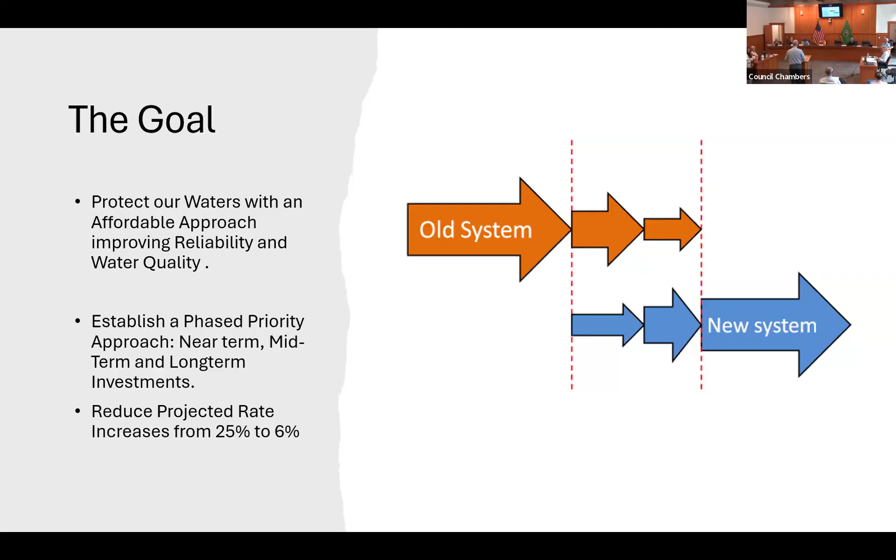Boy, this is great. My eyesight should have something here. So we talked about this.

The other thing that we found was our collection system has some issues with infiltration and inflow of water into the system that was overwhelming our process. When we had the high flow events this last winter, we had peak flows approaching 5 million gallons, with a plant design of approximately 1.5 million.

1.8 million, I'm sorry. So at any rate, we far exceeded the plant's rated capacities, which created a real issue.

The other item that we found was a communication system that's extremely dated. Some of our systems were put in the 1990s, and now we're into the late 2020s, so there are some upgrades that seriously needed to be addressed and needed to go forward.

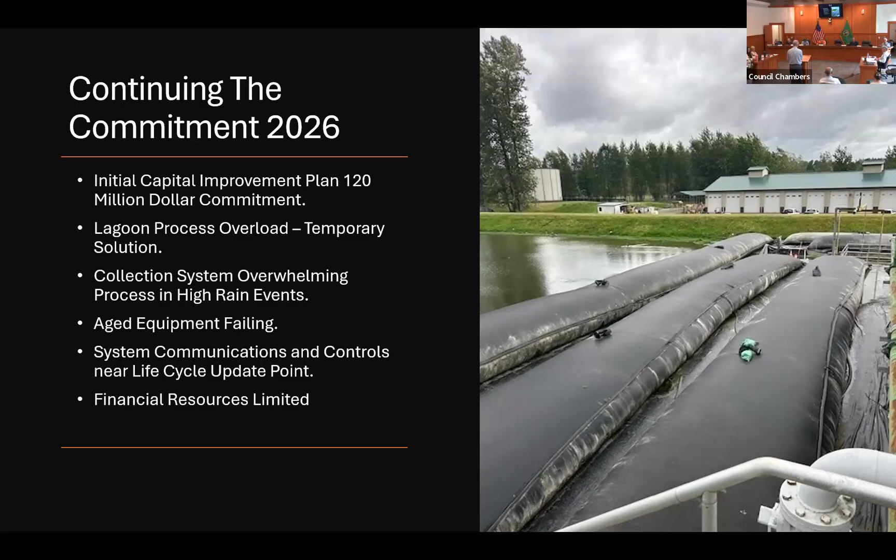Most importantly, we have a headworks system where all the water enters into the plant through a single channel and then goes through a screening process. We've experienced recent failures, as recent as today, in that system, which underlined the priority that needed to be upgraded and repaired. This last winter was also the point of failure that we had, where we ended up with an overflow situation into our lagoon from the headworks.

So we had to develop a plan, and when we were speaking with Wilson and with Parametrix, we wanted to identify three strategies: what do we have to do right now, in 2026, immediately? Then what do we have to do next, in 2027, 2028? This council is going to be faced with some major decisions going forward.

One of the decisions is that we're moving away from the focus on the solids building, the new solids treatment facility, and moving towards renewing the facility that we have right now, working from the most critical components first, and then working our way out from there.

The first item we need to do is regain that capacity in the lagoon, and then begin the process of having the engineering performed for the headworks facility to get that started, and also for a slight expansion of the existing control building that we have right now. The reason we included that expansion is that it's going to be the backbone for the future upgrades for the telemetry and for the computer systems, control systems of the treatment plant. So that needs to be in place before we can start making those next upgrades to the plant process.

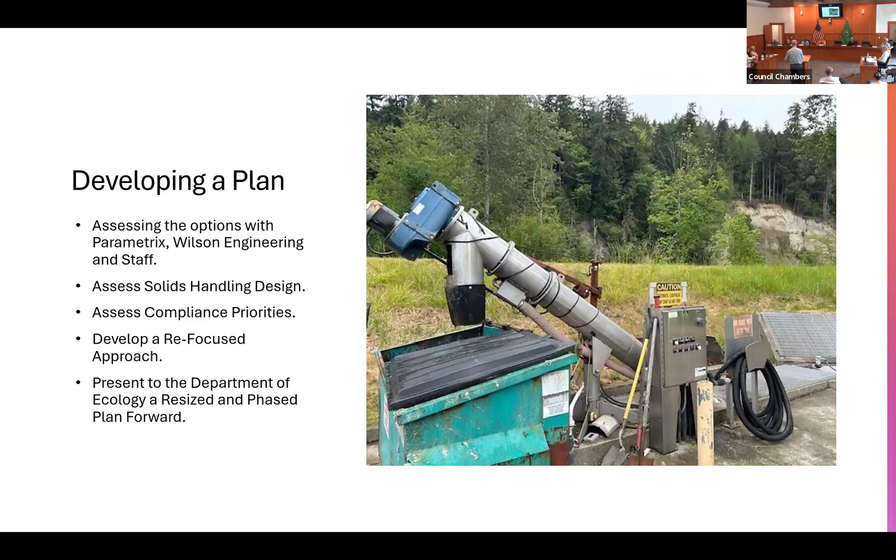In this last slide you can see the headworks right there, and that's what they actually broke today with the shaft. They're currently working with that and trying to locate parts to get it back online again. So we're at a point where we need to have some redundancy in that area to allow for maintenance and for flows to continue unrestricted.

The other key item we needed to address—there are two other items. Flow monitoring: in 2026 we need to begin a flow monitoring system process to look at our dry season and our wet season flows and identify where those flows are coming into the plant, so that we can identify the places which need to be repaired first.

We suspect a few key areas that are the major contributors to the inflow infiltration of the plant, namely along the Carbon River, where it goes from River Street to the treatment plant. That's a high suspect area, just because of the nature of the trees, the water table, and proximity to the river there. So we're going to try and make sure we identify where that's at.

Another key thing before we go too far forward is that we're going to be asking council to approve an organizational study on the Public Works Department, to look and make sure that we're right-sized to be able to go forward with this. When we go before the ratepayers, we need to be able to show that we're making all of the steps to be as fiscally responsible as we can.

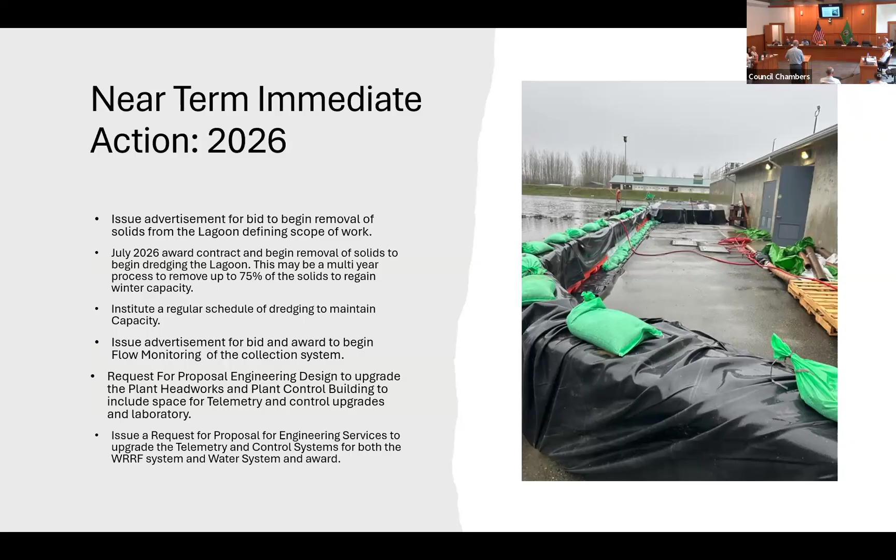And then we move into the actions so that by 2028, we should hopefully be going to construction on some of these items. We need to have that headworks. I think our public works would be happy if it could happen before then, but knowing the amount of work that our engineering firm's gonna have to do, it's probably more likely between late 2027 and 2028 before we see action on the headworks and on the treatment facility, on the control building.

Following that, we need to go out for bid for engineering to upgrade the process improvement inside the treatment plant. What that's gonna do is gain us capacity as we move forward by working with our control system within the plant, a newer updated control system and mechanical devices that will help make that plant run more efficiently going forward.

A lot of our equipment is, again, mid-1990s dated. It was the technology at that time, and the technology we have today is far more advanced: more efficient aeration blowers, more efficient ways of transferring oxygen into the water, more efficient ways of disinfecting with the UV system. And speaking of the UV system, that is also obsolete. Right now they've been getting parts off of eBay. So we need to update some of these systems that are at the point in their life cycle where they're able to make it, but they need to be updated.

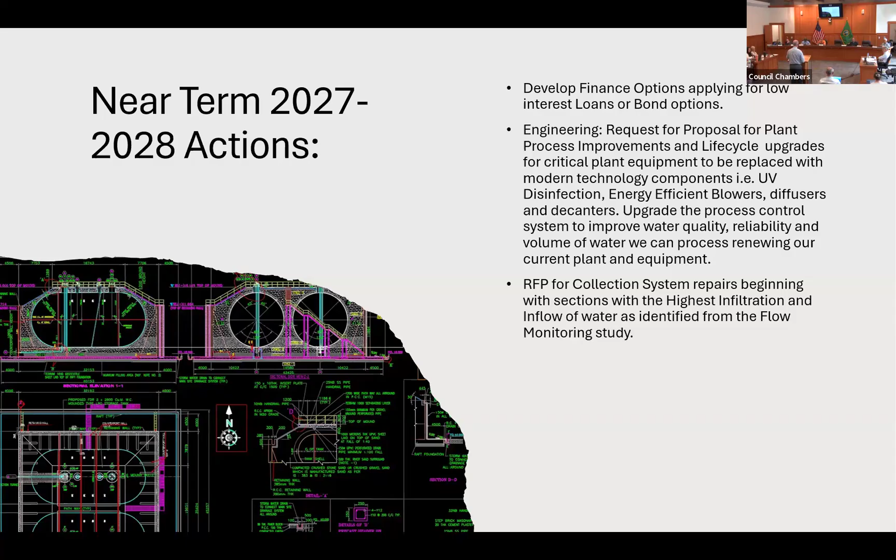We need to create additional space to bring in upgraded servers for the control systems for the treatment plant. Also during that time we need to look at a telemetry study to include our water system as well, for all of our offsite facilities, pump lift stations, to communicate with our treatment plant. So we have a lot of work in the way of communication and telemetry to move forward on, and it's going to take some space, so that backbone has to be in place before we can start the telemetry work and control system work in the plant.

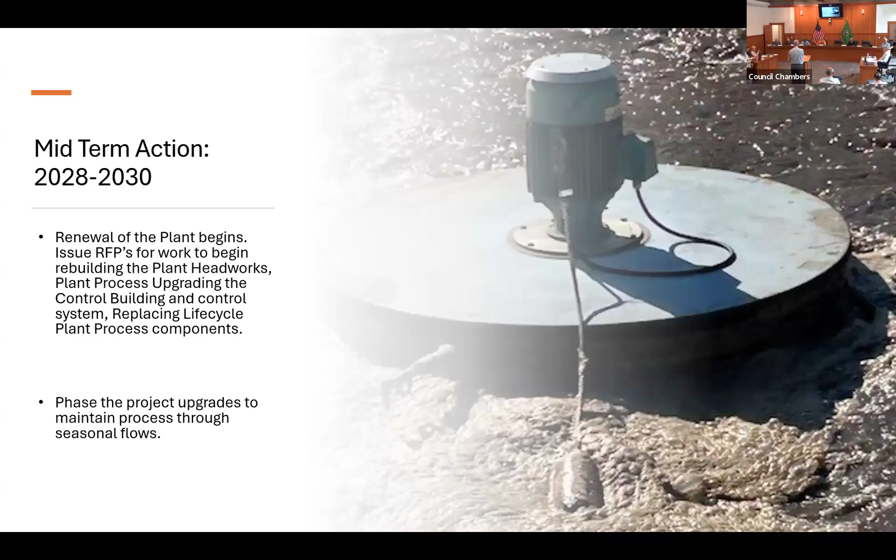They're going to require us to put in some test wells to ensure that we have no water leaching through the liner into the groundwater there, but that's just something that would require a new lagoon, or any lagoon going in today. So at any rate, that's kind of where we're at.

I think the overall plan we have now has gone to a 20-year phased plan with near, midterm, and long-term improvements, and an evaluation process on that.

This also ties into our rate study. Our goal was initially a 25% projected rate increase for sanitary sewer, and that just was a no starter for us. It was really just too much, I think, for the citizens to take on. After reviewing the rate study, which will be coming before you, we're looking right now at about a 6% increase in rates to be able to stay consistent with our capital improvement plan going forward.

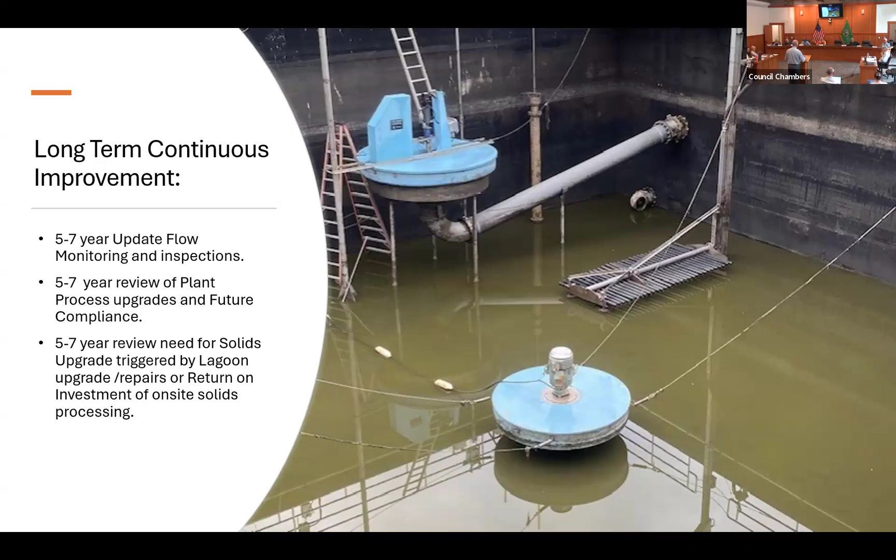And I thought that was really good. That rate isn't showing any staffing changes, but it's focused just on the operations and maintenance of the facility, and on the capital improvements we need to make to our facilities to keep up with everything.

So, questions? We have Engineer Hungerford with us, and Steve Daston with the treatment plant, if you have any questions I can answer.

Ed: Did Parametrix design the original plan in '72? Oh, good question. You know, I don't know who did the lagoon in 1972. I don't think it was Parametrix, though.

Okay, yeah, it was designed for 1.5 million. Were you saying we're taking in 5 million? No, actually you corrected me, it was 1.8, but the SBR system was done by Parametrix. We actually received a national recognition for that treatment plant.

When we built it, it was cutting edge. It was under Mayor Paul Rossi, and engineer Doug Berkshauer was the person who was the engineer at the time that did it, and it was cutting edge technology for the period.

The idea of the plant, which I thought was ingenious, is that it was a sequence batch reactor where you add on an additional cell to gain more capacity. So we built it with the idea that we would have to add on additional cells in the future to keep up. It was a package type of plant where you could continually expand off of it.

So the city received a lot of recognition for it, and it served us well. Yelm has essentially just switched over to a different process, but they had the same process at the same time that we did, and it operated very well.

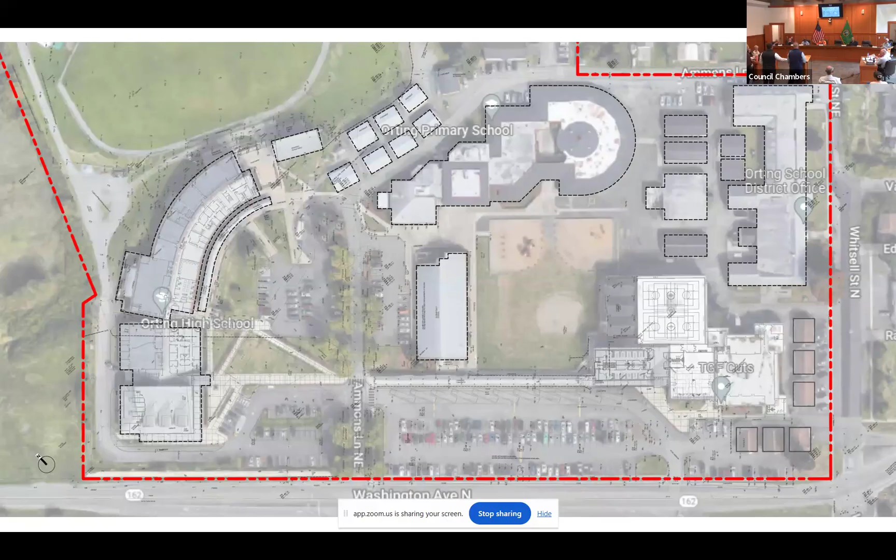This is the current high school site. Cliff and I were principals there for a long time. It has a district office, an elementary school, and a high school. Right now, the majority of our high school students are housed in portables. That's going to change when the elementary moves locations.

So Matt Carlson, who many of you know personally and have known for years, current principal, he'll take over the entire facility, save the rectangle that's the district office.

So as we're thinking about where this new facility goes, we're thinking about what makes sense now and what's going to make sense for the next 50 to 100 years, because many of our buildings have been here as long as many of us have been here, so we haven't made those changes.

Part of what we still see as a way to secure it is that frontline buffer. If you think between the Performing Arts Center, the West Wing, and the gymnasium, we think that what we would call the public edge is where we'd see that gated and secure. Right now we have an active roadway through the middle of campus, 1,400 students moving back and forth, and it's not secure, it's very porous. So we want to tighten that up over time.

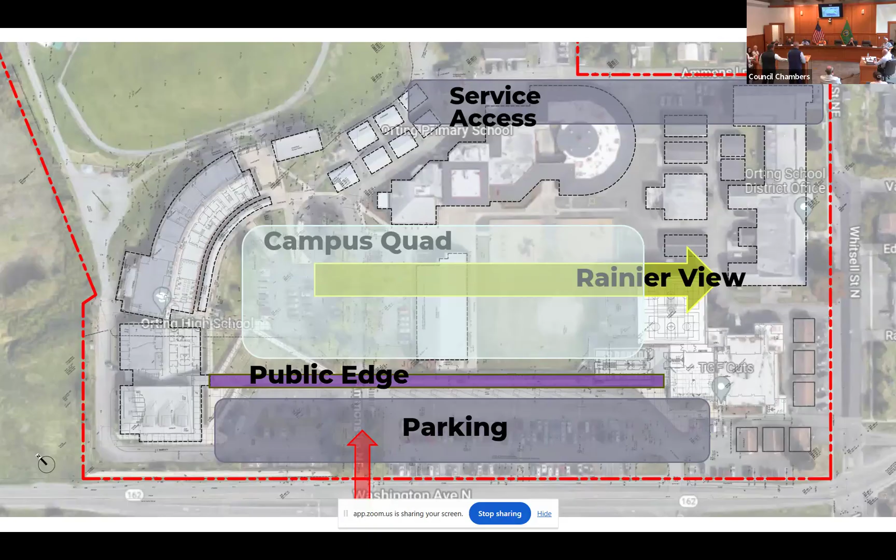So after this phase, we still want to maintain that view and the connection. As we're thinking about where this first site goes, that's part of the idea - how do we make it more secure, but hold on to what makes Orting, small town, big view, special. So looking at where that's going to go, we've determined that the best place for this next new wing is right next to the West Wing.

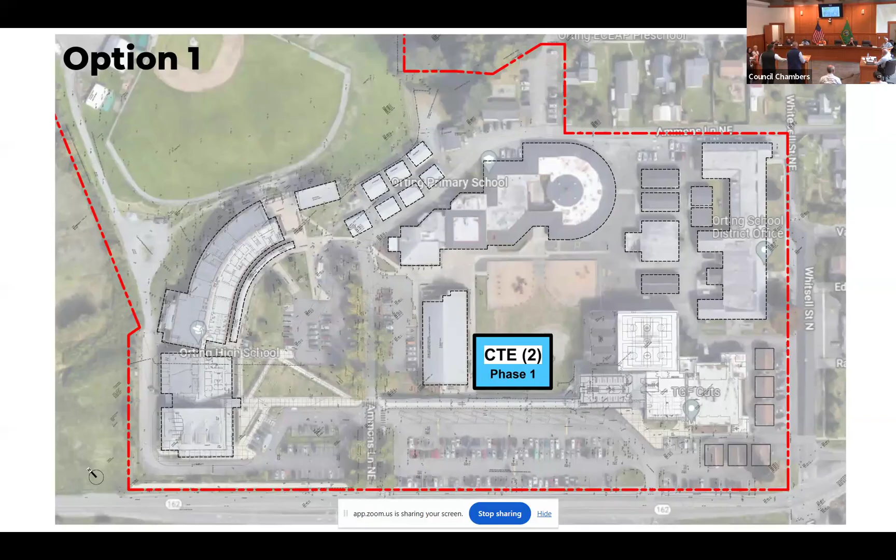So the West Wing is just immediately to the left, and it's sandwiched between that and our current gymnasium facility to the right. As we will come back and share future site plans, we think that's going to be the best location at this point in time because we can expand and grow in two different directions in future phased bonds, not in this one.

So when we get done with this phase, this is what it might look like. Our 1950s gymnasium that many of you competed in back in the day, it is literally falling apart. We can't refinish that gym floor any further. You see cracks in the stands. We think that's a tear down at the end of this phase.

What we could do if we relocate and move those 6 portables that surround it is open up to more parking. I know many of you here, high school kids are parking all over town. There's a shortage of parking, and we want solutions to that. So we think at the end of this, the portable solutions that are in our parking lots now go away and that facility comes down. Then we open up more parking space for our students, our faculty, and our community as well.

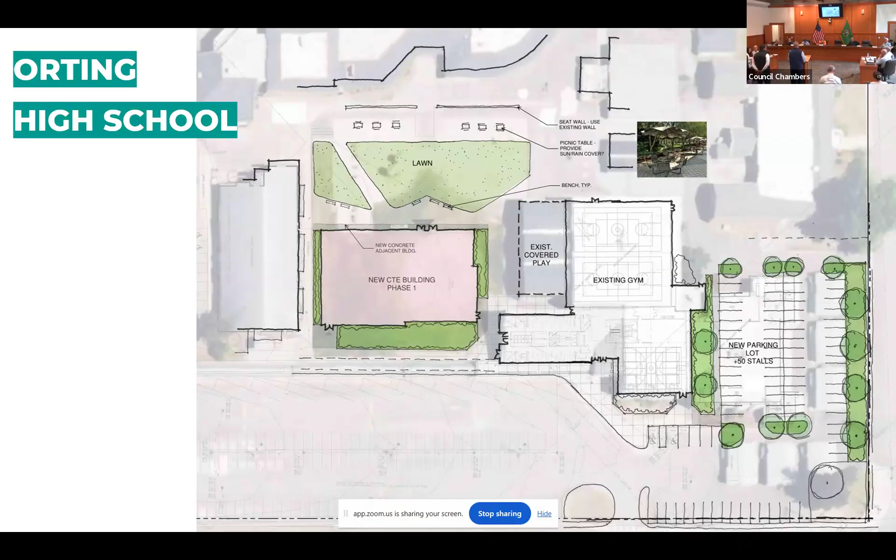This has been a dream of Cliff's - our new career technical education wing. We're really excited that this focuses our kids on careers and trades. Most of our graduates don't move away and stay away - they come back and fight and compete for local jobs. So we've excitedly built some partnerships, which Cliff will talk about, and I'll share a little bit about what's happening in the career tech ed wing.

It's what we heard loud and clear from our constituents. A lot of our students - probably more than, we have a higher average than anyone in the county - our students go straight into trades. But what you're finding is when you go onto the trades, someone gets a clipboard and someone gets a shovel, right? And you choose that based on what skill sets kids come out with.

How do you talk to kids about welding? They look at videos about welding and read about welding. If you go onto the job site, you're not likely to get handed the welder - you're likely to get handed the broom. So what we really need is students getting their hands on up-to-date tools, being prepared to go into the workforce, go into trades, and be competitive in our region.

So with that, we need facilities with present tools, up-to-date equipment, in both the sciences and all of our trades. Part of it is we're remodeling the high school, and we're going to put in the back a metals and wood shop to support our ag mechanics program. We're going to update our culinary facility because it doesn't have proper ventilation - literally if you burn bacon, we evacuate the school. There's no vent, all you can do is crack the window. So we'll be doing some remodeling over at the high school and then adding this building.

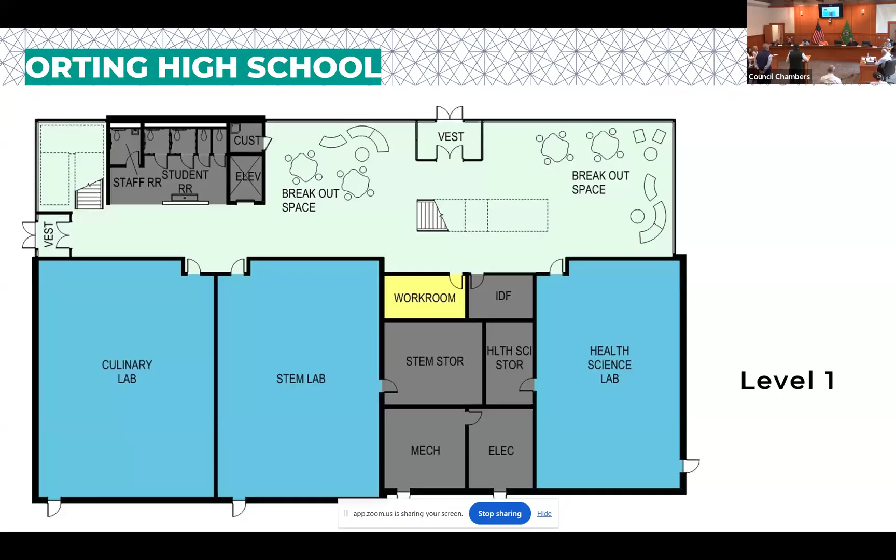What you see here is a culinary lab, STEM lab - which would do science, technology, engineering, mathematics - opening up to a breakout space, some storage, and a health science lab, which we know supports sports medicine, health, and medical careers. Upstairs would be multiple science labs - 4 science labs.

Our current science labs do not fit a full class. Our current science labs don't have enough oxygen - the only way we can meet health code is we had to add a fan to the windows that we turn on while students are present, so there's enough oxygen in the room. So definitely we need a new science lab, and that's what will be provided upstairs.

Share a little bit about Clover Park Technical College. Oh yeah, we went to Clover Park Technical College, and what we're finding is there's some very highly competitive jobs for kids that go into Clover Park Technical College. They do something called the mechatronics program, where back when I went to school, you either welded or you learned computers, and those two didn't play together. But what they're calling now is Industry 4.0 - they don't want kids who can just weld and they don't want kids who can just code. They need kids who can run a computer, run a machine virtually, and can fix it. So they have these mechanical arms that the kids work on, keep up, oil, and check the friction on everything.

And they also have virtual machines running 5 to 15 seconds, or even an hour, ahead. They're simulating what happens if certain changes are made, and fixing the machines virtually ahead of time. They know when a machine's about to break, so they can go in and fix it without stopping production. Cutting edge stuff, it's amazing.

So we went and visited them and asked what they need our kids to be able to do to get inside this and land viable jobs, starting at $80,000 to $90,000. They said they need hands-on machines and complex systems with multiple variables that students can learn to navigate. They don't care if it's a slot car working with AI or a gyroscopic deck, like one they showed us for an oil rig that was being welded, where workers had to handle both the computer side of the gyroscope and the welding side.

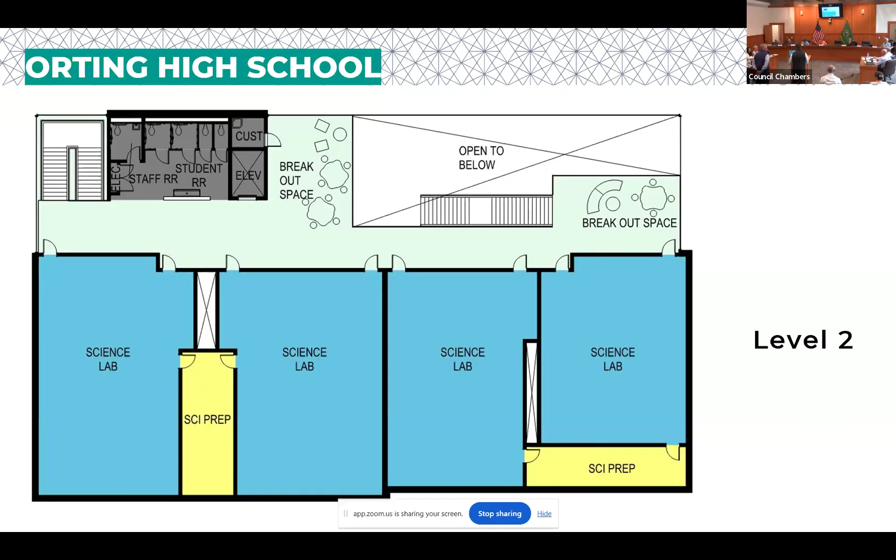Next up, Orting Elementary School. I'll give that over to Liz, and she's going to walk you through what we're thinking for the elementary school.

Part of the bond scope of work was a commitment to a new elementary school for 600 students, and also included a field. We want to highlight that it was really important to the district to have a multi-use, community field, but also one large enough for our high school events, so that scope was enlarged a bit from our initial plan.

To the south is a ditch that we're going to be filling in, and there are some supporting wetlands we'll be mitigating as well. We haven't started that process with the city yet, and we're anxious to do so. We're wrapping up both a traffic study and a wetland study, so a lot of our due diligence investigation has been ongoing for the last few months, and we want to make sure we're doing it as accurately as possible.

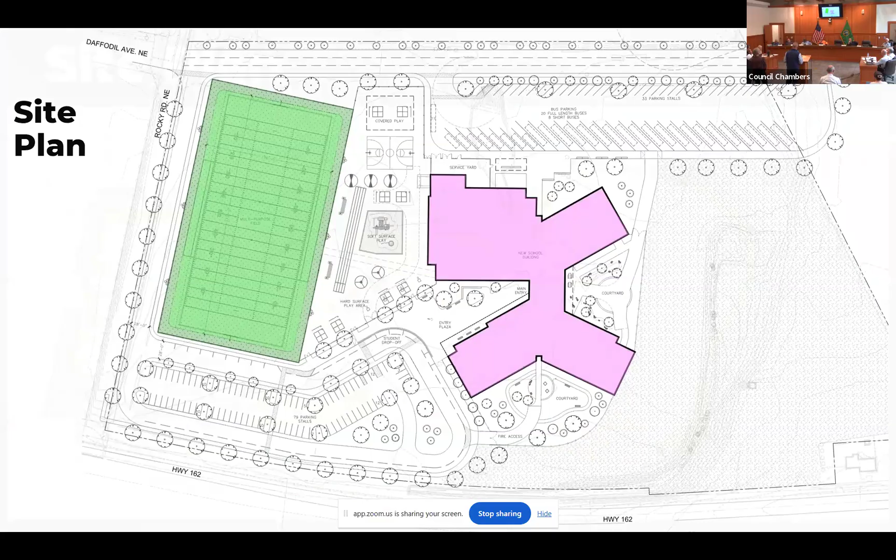We've kind of mapped it out, and there's room for tennis courts, soccer, baseball, fast pitch, you name it. We're thinking really a place where the community, not only just the local but the surrounding, can come and recreate locally. Part of that will be visioned out as we complete this and think about what's next. That's some of what we're excited about, the what's next conversation. How do we evolve for the future to support the surrounding areas?

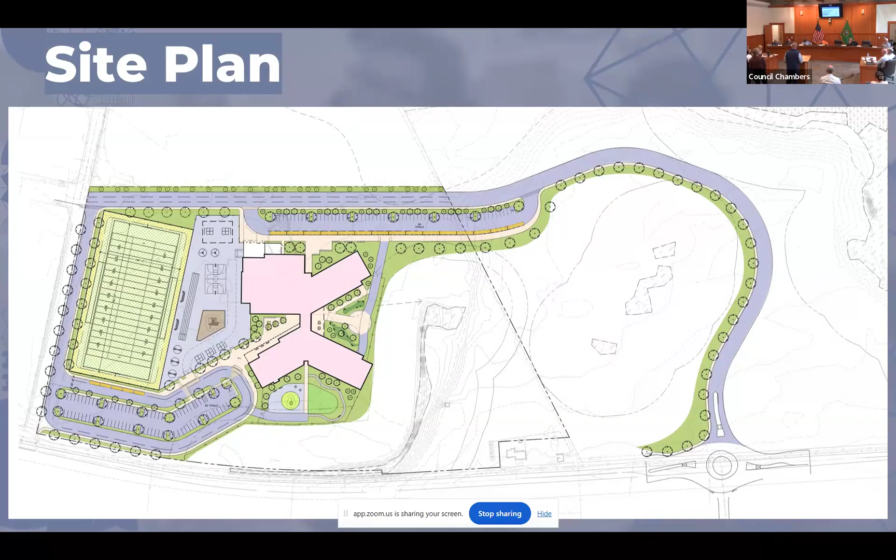You don't want to get too much into the floor plan, however we have been, similar to what Cliff had done before, outreaching to teachers and students for input. Safety and security is a primary goal. Although we're really heavily supporting the community in athletics and access, we want to make sure our school is super safe. So we're just starting those conversations as well, about fencing and things like that, to ensure access is single point so people know where they're coming and going.

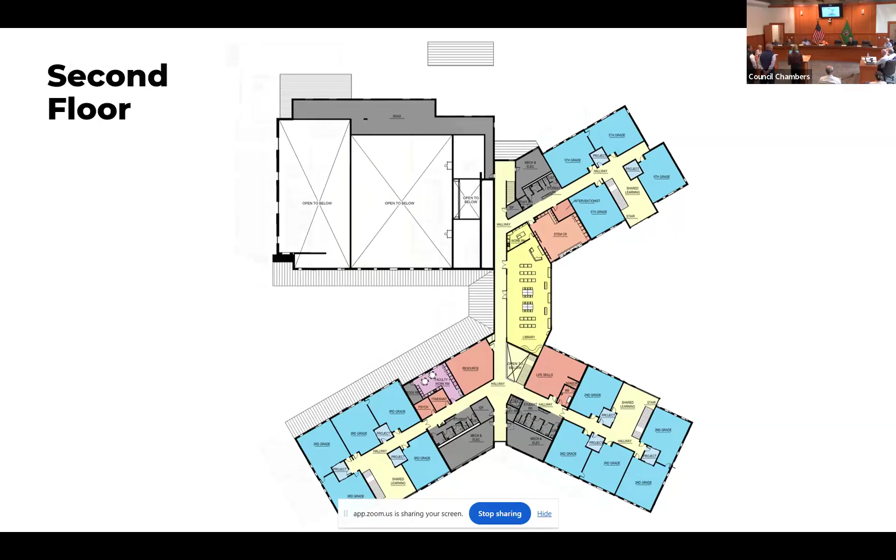That admin core, you can see out, and also look in for that main corridor yellow space, as well as just as important as that beautiful view, right? So to the right of the page is the mountain view. The architects did a great job, I think, to create this star footprint, if you will, that really hugs and focuses on that mountain view.

One component that I think was interesting - I was on the phone with the contractor on the way down here, and he's like, this is actually laid out to sequence very well. We talked briefly about schedule, didn't dive into the construction schedule, but we saw how quickly they're moving forward. So with an April start, moving dirt, they want to go into underground pilings right away after a month, and then even work on vertical steel, flying steel by the end of July.

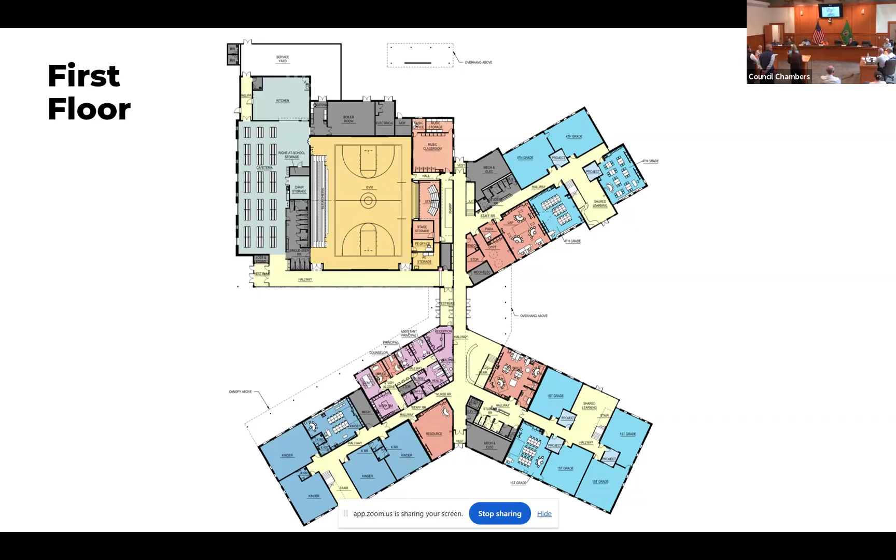Next slide. We definitely are aware of your design review guidelines. I think the mayor has had a couple outreach meetings that we've done with our architects to talk about materials and form. Our priority for the community is making sure this is a timeless building that we can meet within your general outlined criteria, as well as the suggested materials. We want materials that are durable and maintenance free.

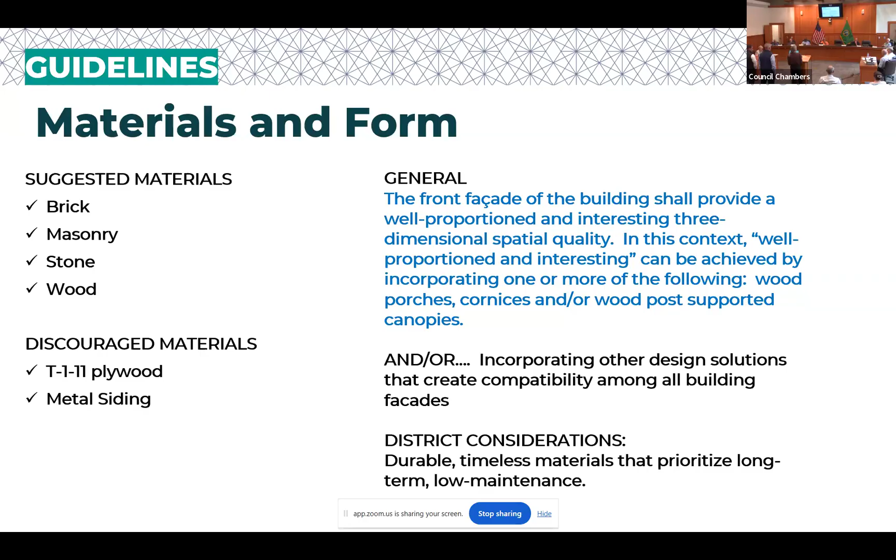So one component, we might see a lot of wood character in the building. In the imagery, we're talking about having some kind of siding that maybe mimics wood to make sure we can have a durable building. We haven't decided on any components of materials at this point yet, but I wanted to send some images to you so you can get a sense of what we're looking at.

Some of these design ideas, in no particular order - we are working with architects right now, and we're going to come back to you with further development. That's the view.

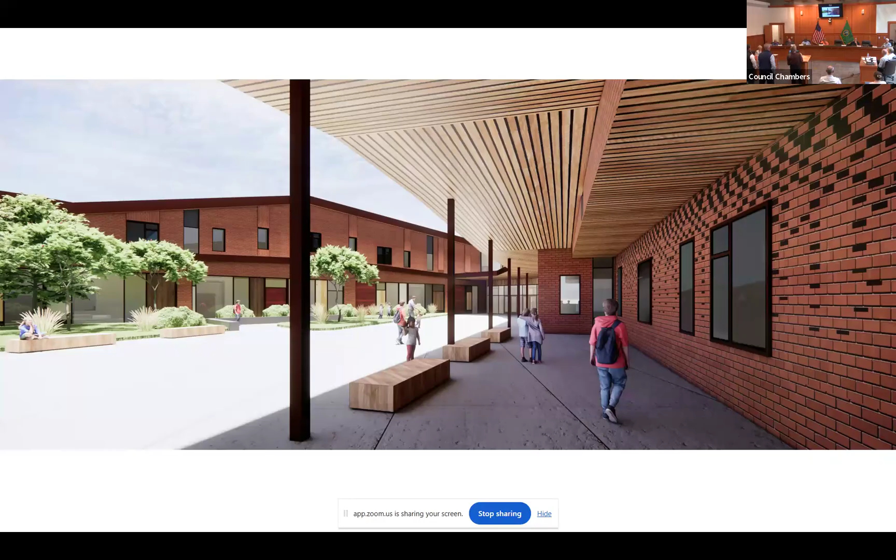This is that entry canopy that you saw at the admin, kind of luring visitors, parents, and kids in.

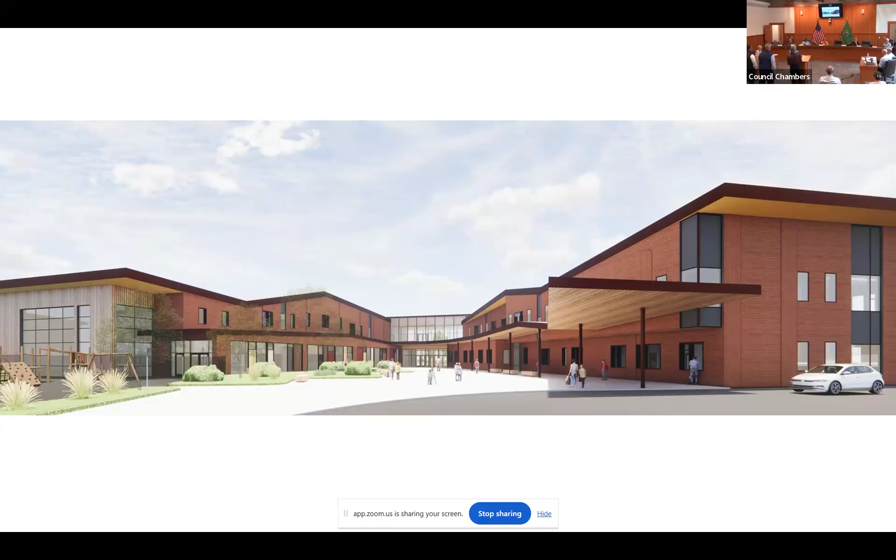This kind of taking a step back in that drop-off parking lot. So this is still the entry. When I noted that area on the left, that's the start of the playground space, and that's that commons cafeteria space. And then the brick on that left side would be the gymnasium.

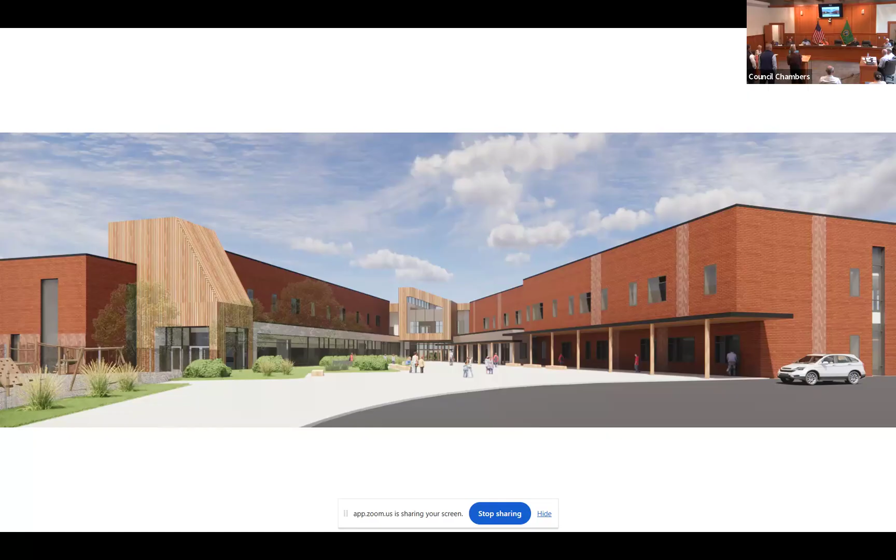This is just another view of that entry space, another way to look at it from an architectural standpoint. And again, these are just design concepts and ideas, so I'll go quickly through them.

Did I miss anything you want to add in? I can answer any questions you have about where we're at thus far in the process.

What is the name of the architect he chose? NAC Architecture. And Skanska is the contractor? Skanska is our general contractor. Okay, and you are the owner's rep, correct? What outfit are you with, what's the name of your company? Alliance Construction Management. Okay, all right, thank you.

As an independent owner, part of our commitment is not only to support local businesses, but we want at least 10% of that project to go to minority women-owned business. So part of how we creatively package and work with Skanska is to make sure that it's attainable for our local contractors to access some of the projects that'll be released eventually.

How involved are the school board members in all of this? We have two of our members that are part of the Bond Oversight Committee, so they're following the journey every step along the way. And then our three presenters, our owner's rep, architect, and builder, share progress updates every month to the board of directors.

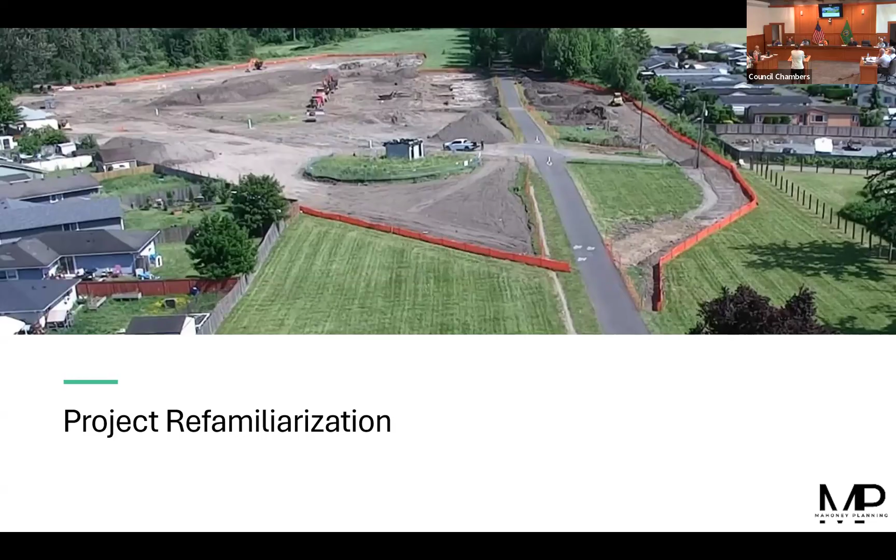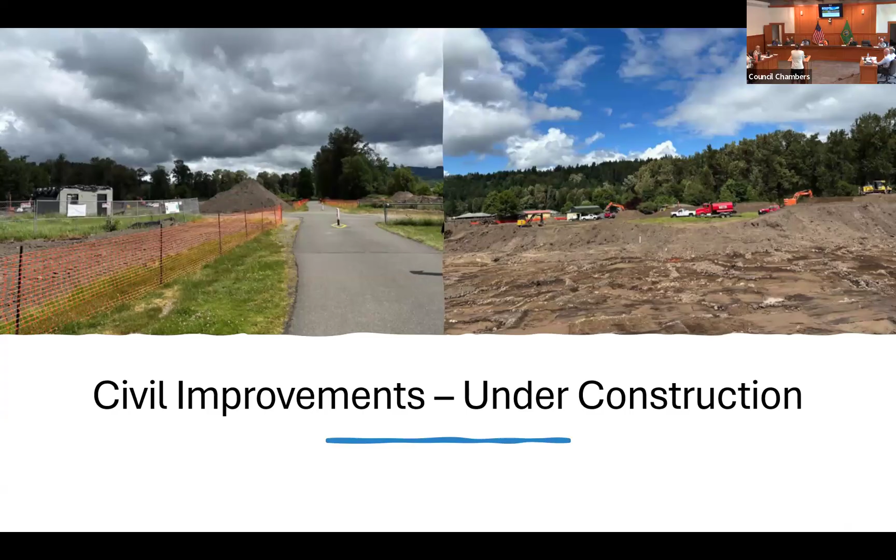So that's the layout of the project that was approved by council. After their preliminary plat and PD were approved, they had to work with JC and I to get their civil improvements and landscaping plans approved. That was done in early 2025, I believe, which authorized them to begin construction. These are some images of those early civil construction improvement days, when they're installing utilities, roads, lighting, stormwater infrastructure, things of that nature.

I think these images go through some site visits that I've conducted over the last couple of weeks, once as recently as yesterday. Part of the plat approval process includes the applicant having to approach planning commission for street names.

Our planning commission has the responsibility of naming streets in Orting. The planning commission decided at a meeting earlier this year to extend the name Brown Way, where Road A comes in off of Brown. And then Road B, if you're coming into the plat off of Brown, the road that feeds into the new parking lot, that's Fisher Street.

You can see that there's no parking signs on one side of either of those streets. That was a requirement of the fire code, because the streets are narrow enough that one side has to have those restrictions to allow for an engine to come through.

And then tract B, which provides access to 2 lots, they decided to name that Bueller Court Southeast. This is all after notable Orting residents.

And then the image on the left shows the wetland protective fencing and signage that's been installed, which provides a permanent barrier between development and any of that protected on-site area.

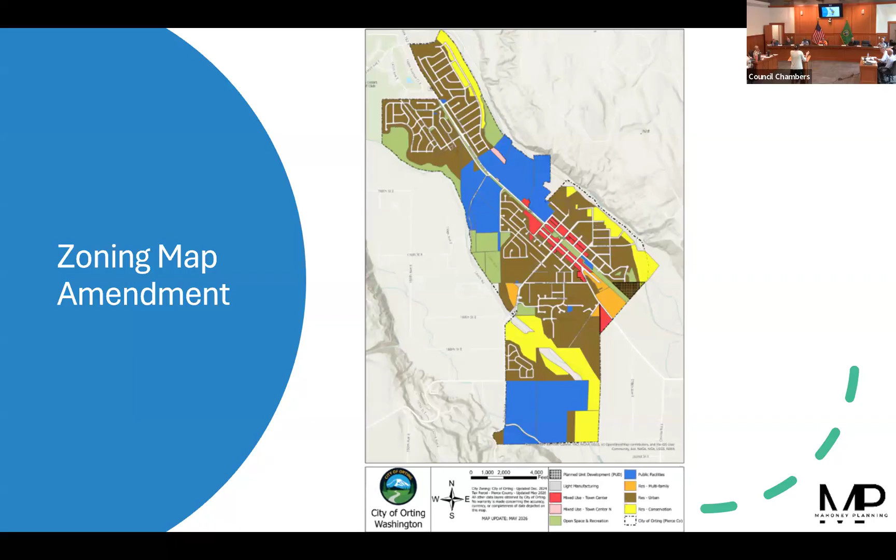And then this is what the zoning map amendment would look like if the final PUD were passed. It requires an overlay of the area. I know this is really hard to see here, but this has been prepared by the city's GIS technician, and there's a layer that's been applied over the new plat to show that it's a PUD overlay.

So the project schedule: we're here today to refamiliarize council and ask council to set June 10th for a public hearing. We'll be in front of planning commission on the 1st of June at a separate public hearing, and they'll issue a recommendation for council's consideration. We'll be back on the 10th for that. Then the ordinance, if council were to approve this, would be effective 5 days later, and so 5 days later they would likely be coming in with their building permit application.

Are there any questions?

Is 4,000 square feet for a building lot pretty common? These days, yeah. Not in Orting, our minimum lot size is 7,200, so we've almost cut it in half.

Some cities have maximum lot sizes now to require developers to... Are we talking Puyallup, Sumner, or are we talking Seattle? Seattle. Seattle's doing some really... Because the reason I'm asking, most people's first question is what are we going to do to keep the small town look? And putting in houses, are we going to change the setbacks too from the lot lines?

As part of this preliminary plan, we approved that they did have that benefit. To what? Some of, they're not allowed to reduce the perimeter rear setbacks. That's not allowed via PUD. So where the subdivision meets up in the rear yards along Road B against the existing plat, they have to have their standard 25-foot setbacks. Okay, but otherwise some of the side yards and front yards have otherwise been reduced, some of the side yards I think down to 5 or 6 feet.